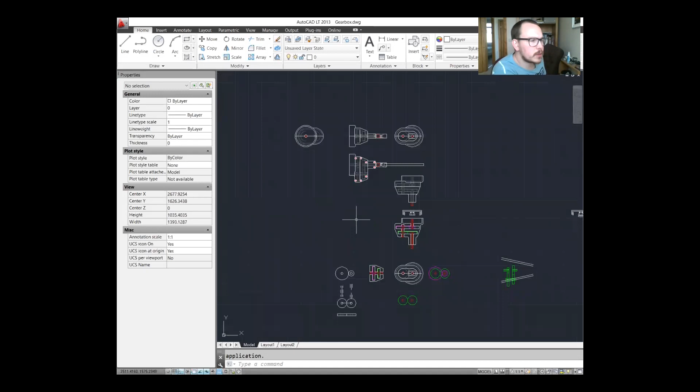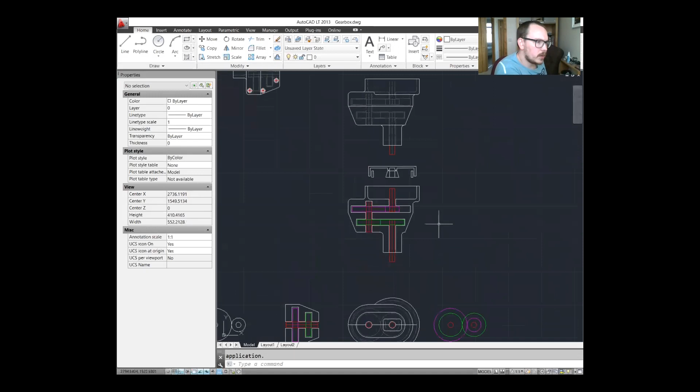So here you can see in AutoCAD at the moment I'm detailing up the gearbox. What I've done is I've taken the maximum RPM and the maximum speed that I'd like to get from this car. I've thought about the wheel diameters, and so from that I've come up with some gear ratios that will get me that speed based on that max RPM.

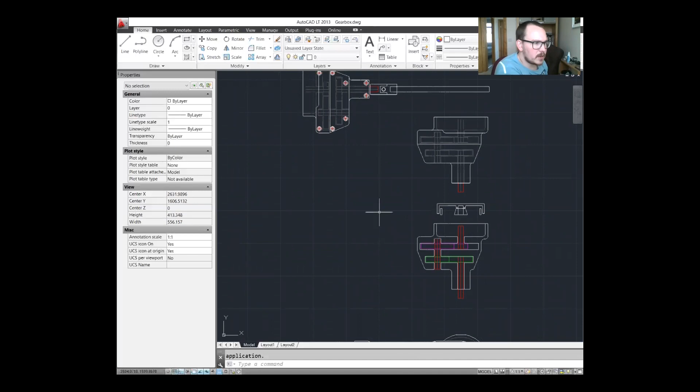Now I know there may be some error in there. There's going to be weight, which is going to put more strain on the engine, loading through the gearbox torque, but if I can get somewhere near my figure, which is 60 mile an hour, by the way, I'd be happy with that. The other thing I need to think about is how I'm going to get the clutch arrangement to work. At the moment I'm looking at like a friction type thing.

So what I was thinking of is having this arrangement where I have 4 pads, almost like a brake drum in reverse, where the pads as well as the drum are rotating. So here, what I plan to do is to add in some springs under the heads of these cap head screws. So that's going to force those pads inwards. So then to engage the clutch, I'd be looking at creating like a tapered race so that a lever would push this green race forward, and that would push the pads out. So that's what I'm thinking about.

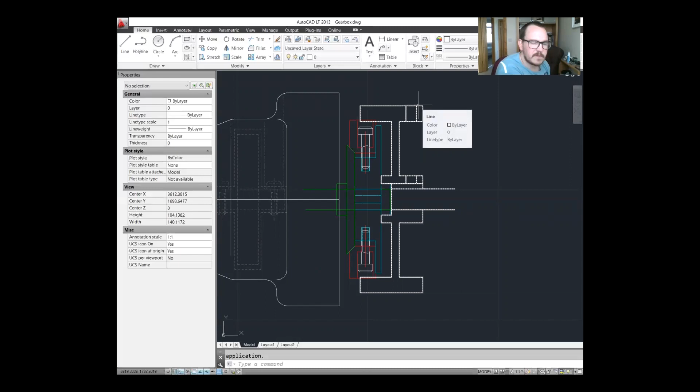And here in white we've got the flywheel that the pads would then grip to. I'm also planning on putting a pilot bearing, I think that's the right word, just on the inside of that flywheel, so the input shaft from the gearbox would sit in that bearing and keep everything aligned.

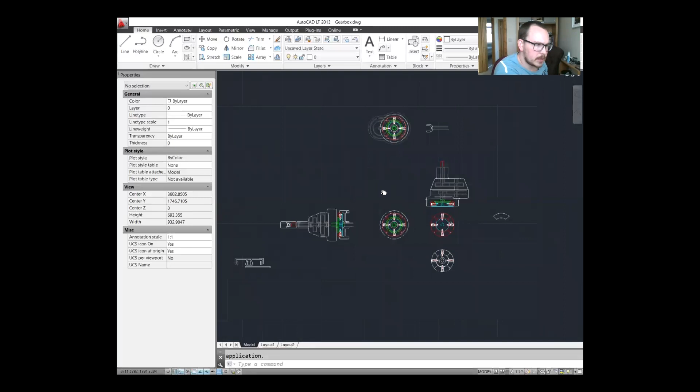So there it is. So that's going to be a little way down the line in terms of building the Caterham, but I wanted to start looking at it now because, as you can imagine, it's going to take a lot of thinking about, and there's going to be design flaws to think about, and obviously it's going to progress as I build the car. There may be obstructions that I need to think about.

What I am thinking about doing is getting into casting aluminium. I would really like to cast the housing of the gearbox in 2 halves from aluminium and then machine it. So that's potentially an upcoming video series where I start researching casting and getting equipment together to do that, probably making my own foundry, my own furnace.

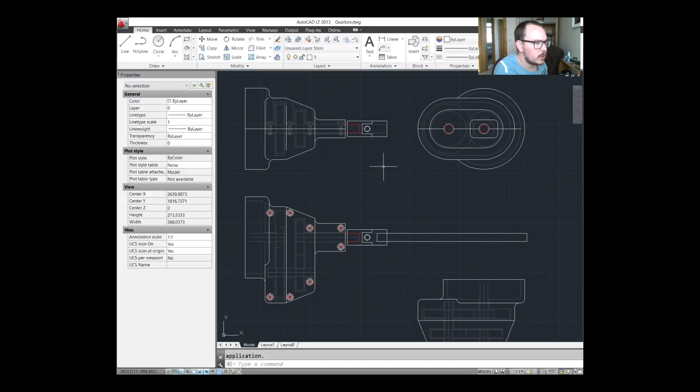Here as well you can see what I plan to do is just get some bought-in items. So the output shaft from the gearbox, I'll probably put a small universal joint on there with an 8mm drive shaft, and then I'll still need to design the differential for the rear, where the 2 drive shafts will come off the back.

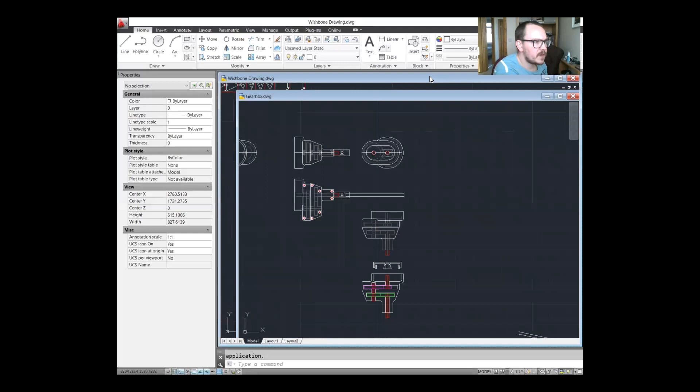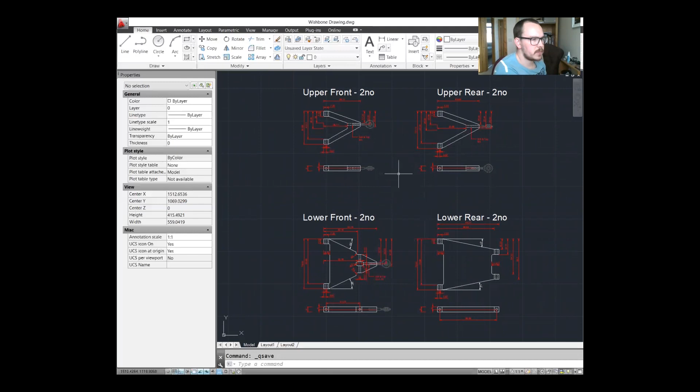So the next upcoming video on the Caterham is going to be for the 4 wishbones, the suspension arms, whatever you prefer to call them, which are these here. So there's going to be 2 of each of these required. Got 2 upper front, 2 upper rear, 2 lower front and 2 lower rear.

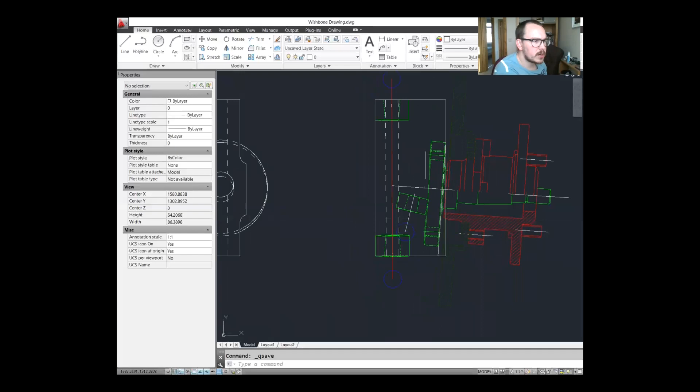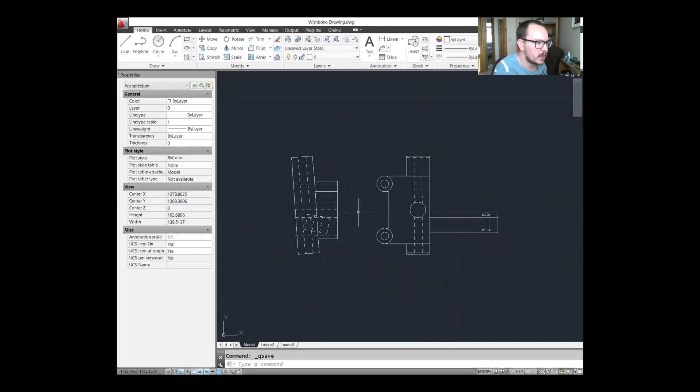What I managed to do was get hold of the CAD drawing for, I believe it's a Ford Cortina front upright. I've scaled that down to match the scale of my car, and from that I'm trying to create a basic design for the front upright using those critical dimensions of the fixing points. Something that I'm able to make without it being overly complex, so I'm still working on that.

But yeah, I'm starting to think about the suspension, making my own coil over shock absorbers. So I plan to make them, buy the springs and put those shock absorbers together. Here you can see the front upright I was talking about. I plan to put like a stub axle that'll thread into that upright.

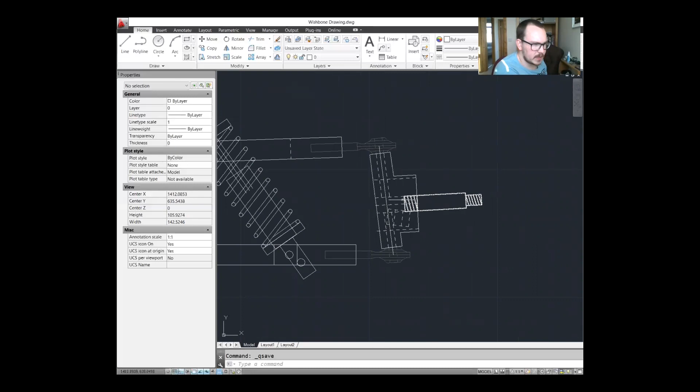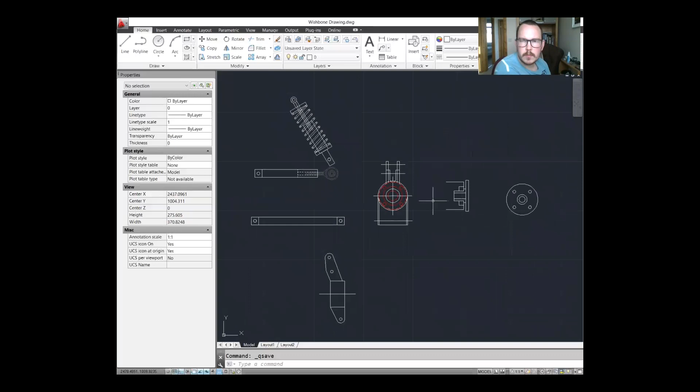And at the moment what I'm doing is I'm just designing the rear upright. I took the design from the book and I'm just trying to make it work with bearings that I can buy. So all I wanted to do is just show you the process I'm going through in designing this Caterham.

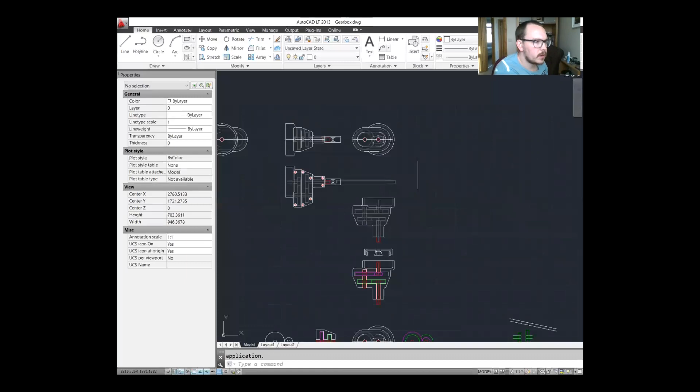Maybe you can help me, especially with the design of the gearbox and the clutch. This is just my first idea on how the clutch might work. Maybe there's a better way of doing it that you could share with us, or maybe there's a video you've seen on YouTube, you could point me in the direction of a similar sort of thing.

Just to give you an idea, the diameter of this flywheel is 72 millimeters, so we're talking about a really small clutch. Now it might be something that's already been thought of. I'm sure there are clutches used in the RC car world, but what I'd like to do is, rather than it being a centrifugal clutch, I'd prefer it to be engaged with a servo. So this is just a wishful idea.

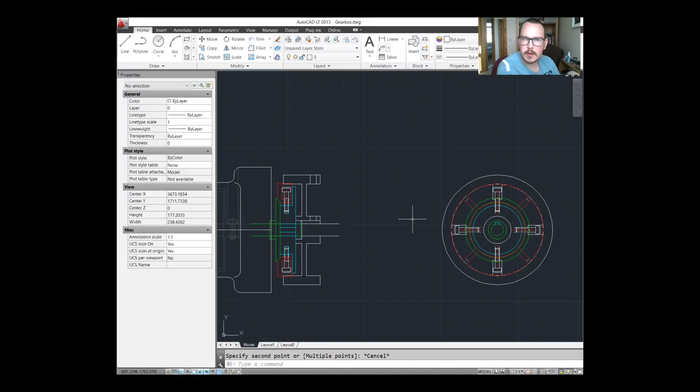I'd like to be able to disengage the clutch and basically rev the engine, just to show off a bit, but also then engage the clutch with a servo and drive the gearbox. So I would appreciate any ideas you might have. Maybe you know a bit about clutches and how they can be made or designed.

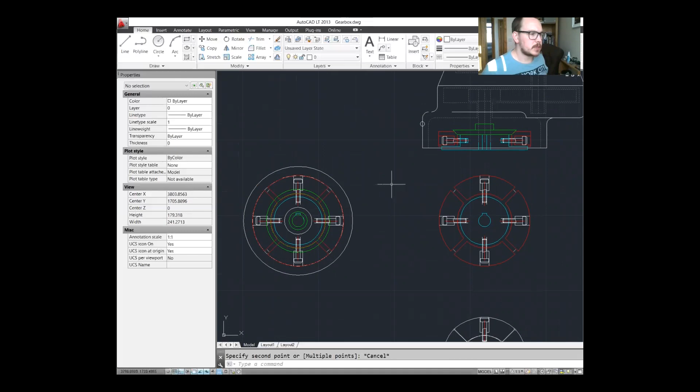So yeah. So the next video of some actual work will be on Friday. I'm hoping to get the video of making those suspension arms and wishbones uploaded.